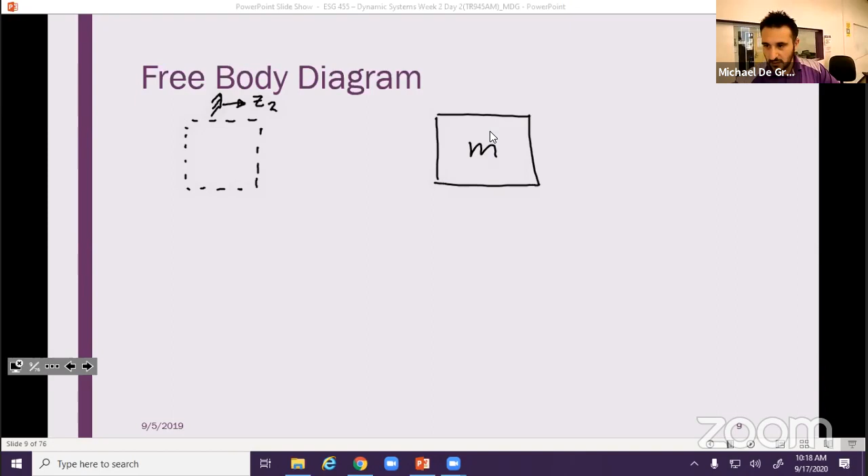So how do we deal with this? Well, we'll start the same way that we start everything, right? The free body diagram. And I'm gonna draw this, and this is my massless node, which is not to be confused with this, which is my mass, my object. Notice one is a dashed line and it doesn't have the letter M on it, and the other is a solid line. I know, it's crazy how you can do these things.

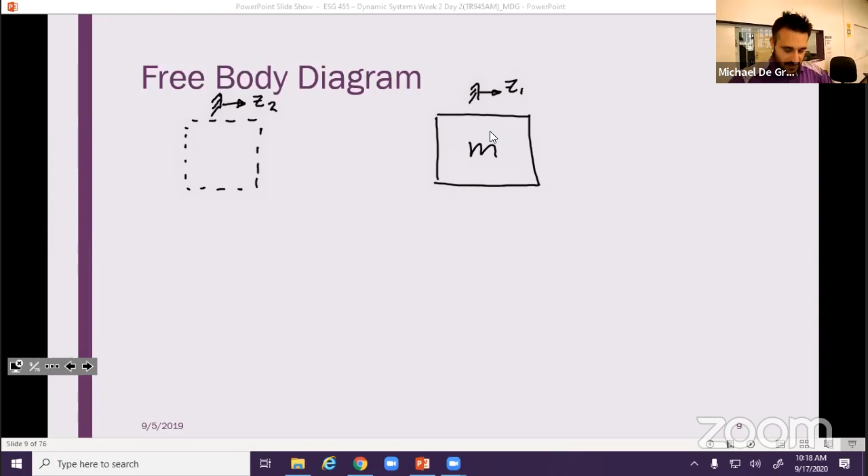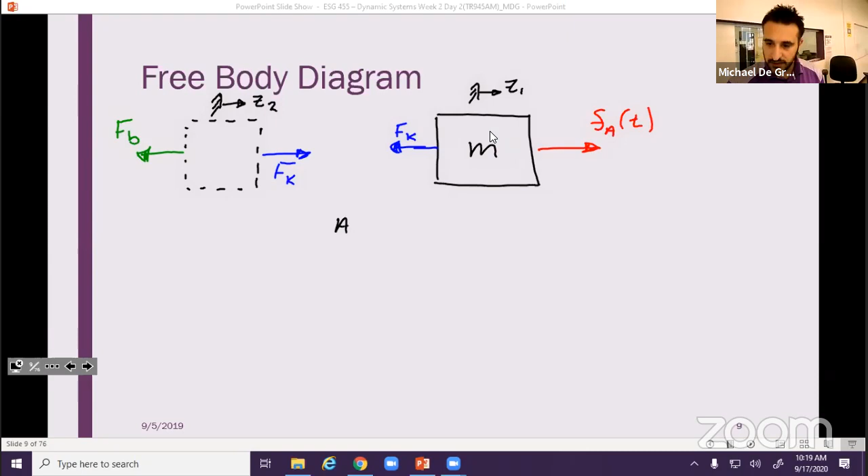What's happening, right? We've got this applied force here, we've got a spring attached here, F sub K. And so what have I assumed about this? I've made an assumption about this system. I have assumed that the first mass is going to move more, so assume that Z1 is greater than Z2. I've assumed that. How do I know that?

By looking at this. Well, I've placed the spring in extension, right? It's pulling back to center. If you were to separate a spring, it would want to come back to center. Remember, spring forces have to be equal and opposite if they're acting on two different bodies. Otherwise, you have an exploding spring, which is not good. Nobody wants that.

Okay, so cool. So can you do this problem and assume that it's in compression? Sure. How does that change it? It's just going to change your signs. At the end of the day, it's going to come out basically the same.

So if we really wanted to do a kinetic diagram for this, right? This would be equal to MZ double dot 2. And this one is equal to MZ double dot 1.

Okay, but what do we know about the mass of the massless node? What do we know about the mass of the massless node? It's zero, because it's massless. So if the mass is zero, then mz double dot is also zero. So my kinetic diagram is this, where mz double dot is equal to zero.

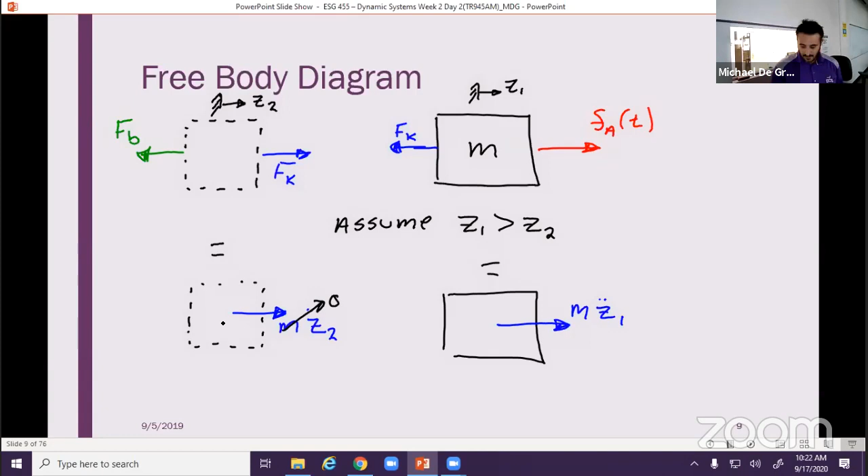So my inputs and outputs, what are my inputs and outputs going to be here? Somebody shout out. Your input force and the output is the position of the mass, I would assume. Sure. Z1. We'll say it's Z1 and Z2 just for argument's sake. But really, we're only really interested in Z1. We're not really interested in Z2. You can make an argument for both because as I pull it, there is that relative displacement that you're going to see between the two.

So mathematical truths, right? Well, it's a linear system. I'm going to sum my forces, mx double dot. I've got a damper, so I need this guy, and I've got a spring, so I'm going to need that guy. Cool, that's it, that's all the pieces. And I wrote X, because I write it as general, but if that's confusing, remember we're using Z, so we can always use Z.

All right, I have one question. Yeah, so isn't the force from the spring going to be proportional to the difference between Z1 and Z2, not the absolute position of Z2, because the damper is capable of moving?

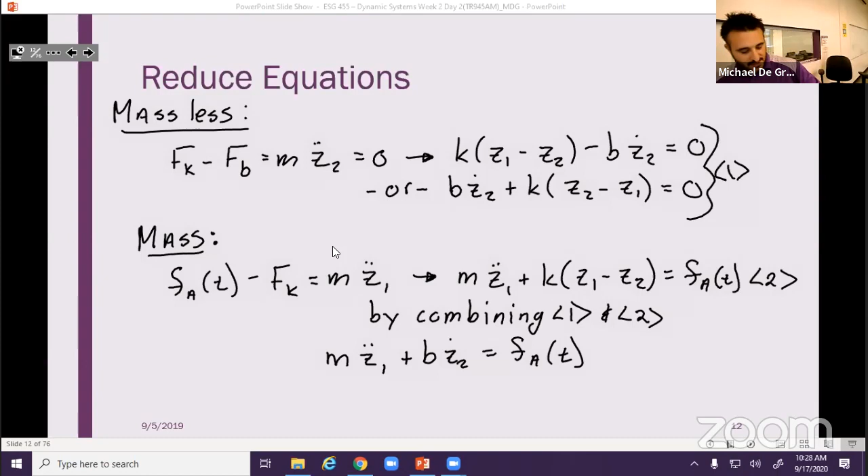So that brings us into our example problems from the sheet. What do we have? We've got this one, and AJ, you're up. Did you want to just see the sheet? Yeah, stop sharing, you can.

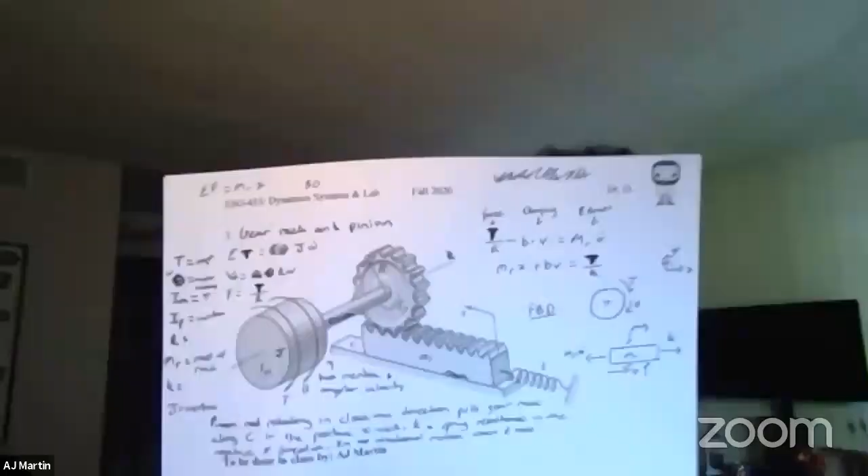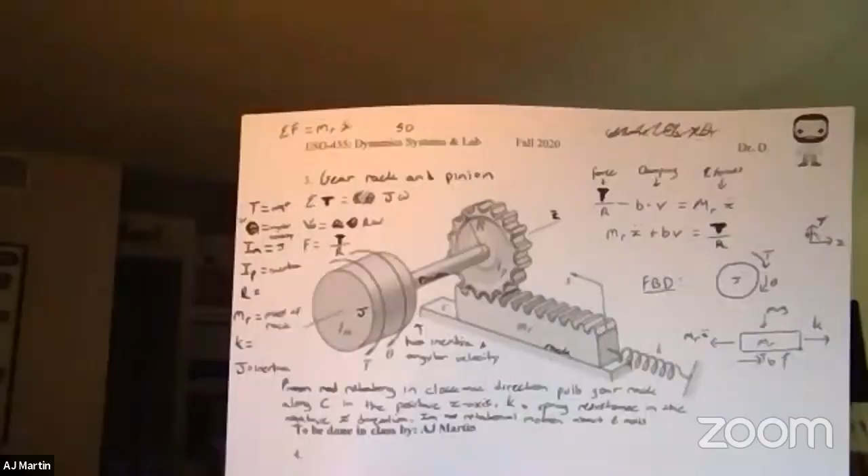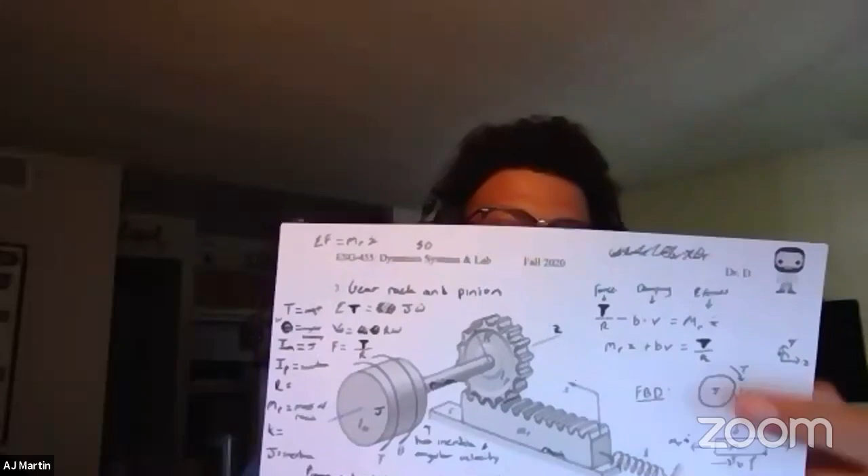I have a lot of stuff on there, but I got my free body diagrams here, and I just wrote a bunch of notes about the problem. Let's talk us through your free body diagram. It's kind of hard to see from the back. So I got the first mass, which I guess is the pinion - it has a torque that's going clockwise and a theta angle.

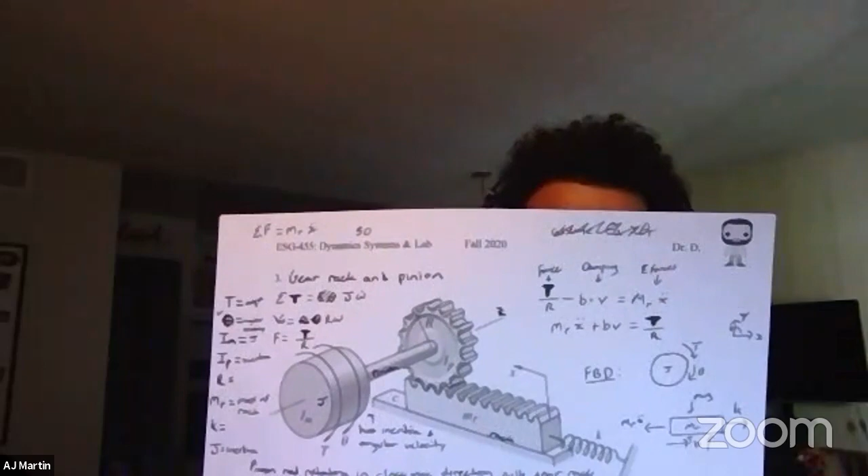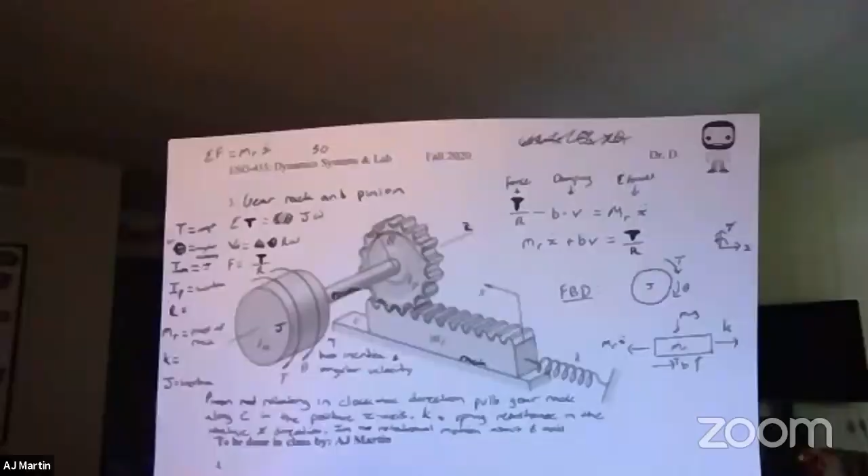And then you have the rack, which has a mass, and you have your forces acting on it in different directions based on the torque of the pinion. It looks pretty good - I'd say there's one thing you're definitely missing, and that's the contact force between the rack and the pinion. A rack is just a flat gear, a flat metal bar with gear teeth on it, and it interfaces with the pinion, which is basically a spur gear.

And those two things touch, right? So at the interface where the teeth touch, we need to have that contact force, because a lot like the problem we did in class with the wind turbine, when those things touch, that's how we're driving the system, through that contact force. Okay, but otherwise good free body diagram.

Looks good. So would that force just be pressing up against the pinion? Yeah, so if you think about how the teeth interface, it would just be a single force that's equal and opposite on each of your objects. And it doesn't really matter which way you pick it, because when we put everything back together, it's gonna cancel out anyways. Yeah, exactly. So let me pull this up.

I'm gonna share screen again real quick and draw the free body diagram, and I'll let you talk us through. Well, you know what, before I do that, why don't we talk about inputs and outputs?

What do we got for inputs and outputs? I didn't get that far. Well, I mean, it's pretty easy. You got, for the input, you have the torque and the pinion. Well, so if the input's the torque, what are we trying to get out of this system?

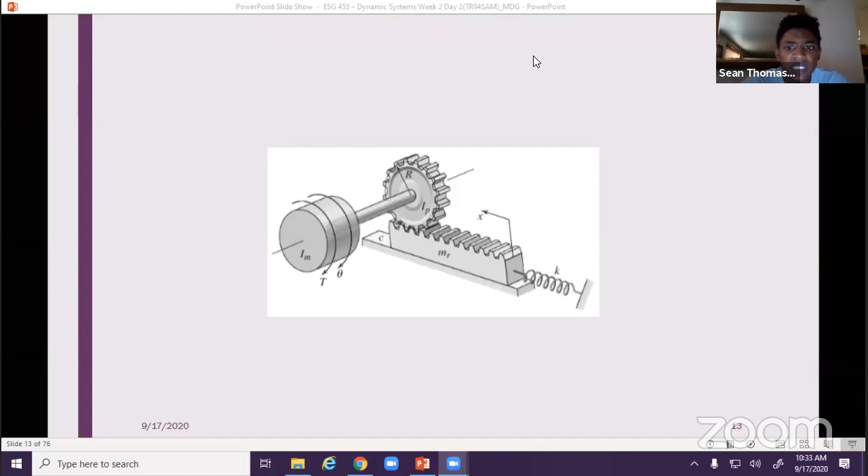Why would C be damping and not just flat friction? Because the book that I pulled this diagram from uses C as damping coefficient. So in reality, why would it be that instead of friction? Because, so you use rack and pinion, you might have heard as rack and pinion steering in your car, and typically you want that to be lubricated underneath. You don't want metal on metal contact, for smooth steering. So we're assuming that there's some thin film of fluid between the rack and the lower part of what it's sliding on, to minimize dry friction.

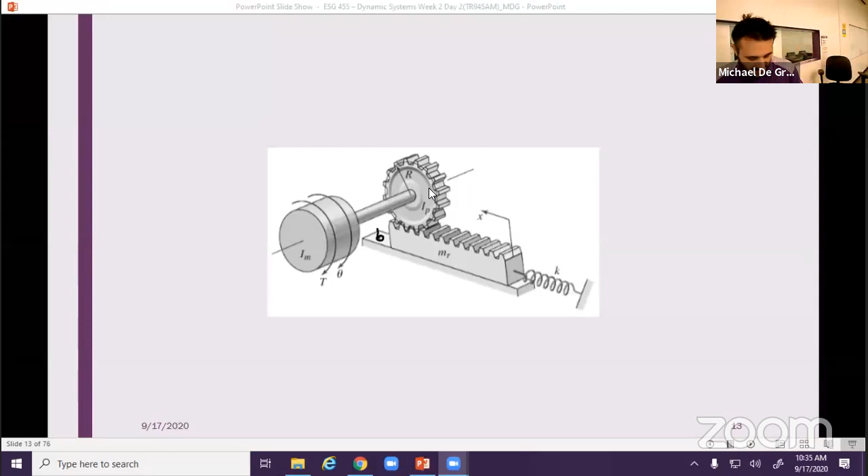What about when you look at this, what about that I sub M term? Why are they telling us about that? Now you can, we did a trick like this when we were talking about the wind turbine. We took all of our inertia and we collapsed it into a single inertia, we lumped it all together. And we're kind of doing that again here in this model, so the actual inertia here is going to be IM or JM plus JP.

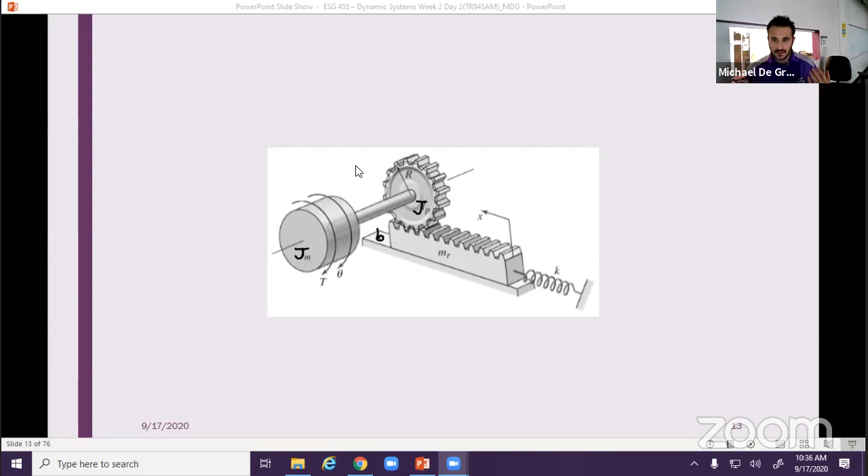So these two things are different. I call them J, and again, the variable changes, they're interchangeable. J and I are interchangeable, B and C end up being interchangeable. So I don't want you guys to get confused on the nomenclature, and I'm sorry for flopping between so many different things here, but just keep that in mind when we're doing this. So the J that we're using in our equation is actually the combination of JM and JP together.

Right, so here's our free body diagram, pretty much. AJ, you had all the y direction forces too, so yours is more complete than mine, for sure. But for what we're doing here, we're only going to be analyzing, we're going to assume that this is not going to lift off of where it's sliding, so we're assuming the ideal case. And you'll notice that I pretty much keep my free body diagrams in terms of the directions of motion that we're talking about. Like if we wanted kinetic diagrams, this would be J theta double dot, which is equivalent to J omega dot, those are equivalent statements.

What in this case would be your F sub C? Because I see your damping force, so FB is damping. FC is contact between the rack and the pinion, right? That's what that is. And this whole thing is moving in that direction, right?

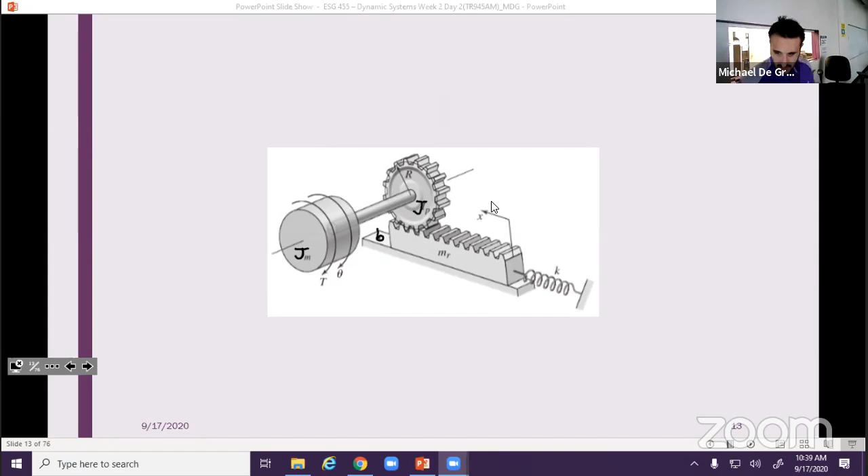Great. All right, so how do we do this? Do you guys want to start with the pinion or the rack? Where would you start? Let's start with the pinion. Pinion? Sure. So what should we do? If I'm going to start at the pinion, what do I do?

We'll go back up to our equations for a sec. If I can get this computer to work. Nailed it. Oh no, too far. All right, so just so we're clear, right, these are the equations, the truths that relate to my pinion, and these down here are the ones that relate to the rack, right?

So we're starting with the pinion, and then I've got to sum my torques, right? What do I have acting on this here? Oh man, well I forgot something on my free body diagram, right? Need that capital R. Okay, so I've got that torque, and that torque is acting in the positive direction. But I've also got this force, right? So how do I make this into a torque? How do I talk about the torque or the moment that is produced by that force on this system? We need the radius, right? It's just the force times radius, right?

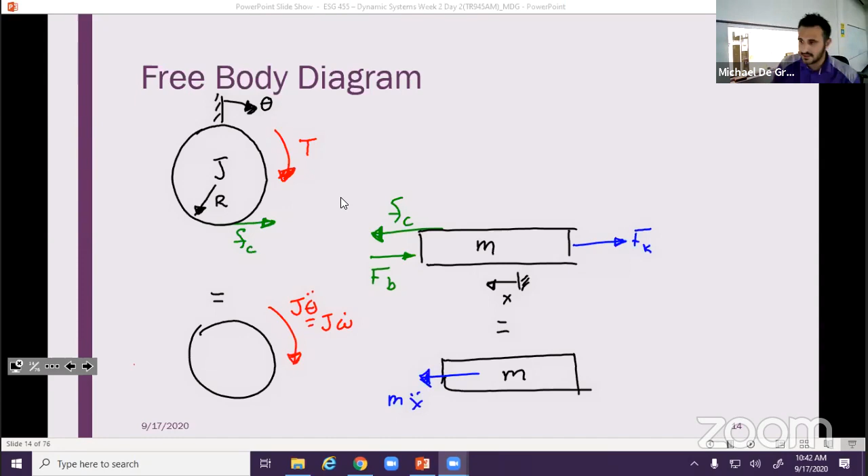All right, so is that going to be a positive or a negative torque contributed by the contact force on the pinion? Should be negative. It's gonna be negative, right? Because I'm gonna use my fancy moment simulator here, right? Okay, imagine what my fingers are holding at the center of the gear, and I push in the direction of that force. It's going to cause a counterclockwise rotation, which according to this system would be negative, right? Awesome, awesome.

So we can write out, to be truly pedantic, the force of the friction is just opposite whatever the direction of the torque is. So if it's negative in this case, but in a general model, it's just the opposite of whatever the direction of rotation is. So that F sub C isn't friction though, Danny. That's a contact force of the teeth on the pin, between the pin and the rack. Right, we're assuming, remember, we're basically not even looking at friction unless it's specifically called out as viscous friction, as damping in a lot of these problems.

Right, we're trying to maintain the linearity. Can you go back to the model? The model, yeah, I got this one here. Free body diagram.

Looking at this, so we're not talking about the contact force being negative, because it's not the torque, since that's heading in the positive direction. What component of this is going to be negative?

So this contact force is creating, by me applying a force here, right? If this was not connected to anything else, and you just had a wheel there, and you start pushing on the bottom with a known force, that would create a torque about the axis of rotation. That would be a negative torque or negative moment because it's that force times that distance, and it's going in the counterclockwise direction here, because according to this system, clockwise is positive.

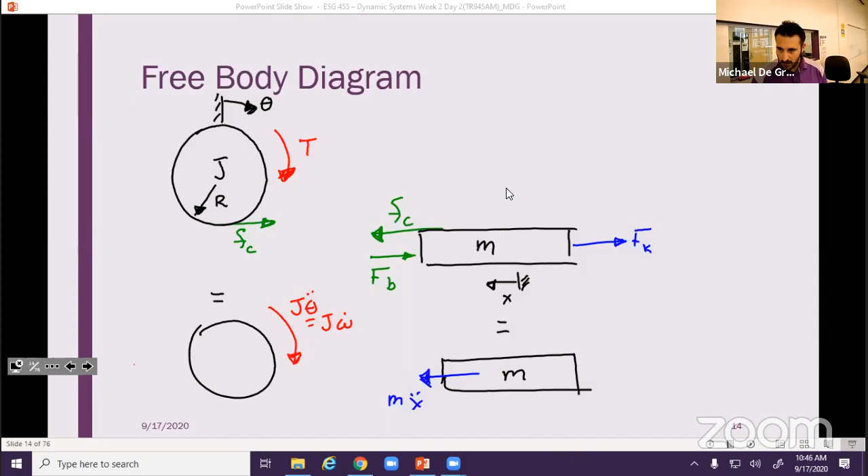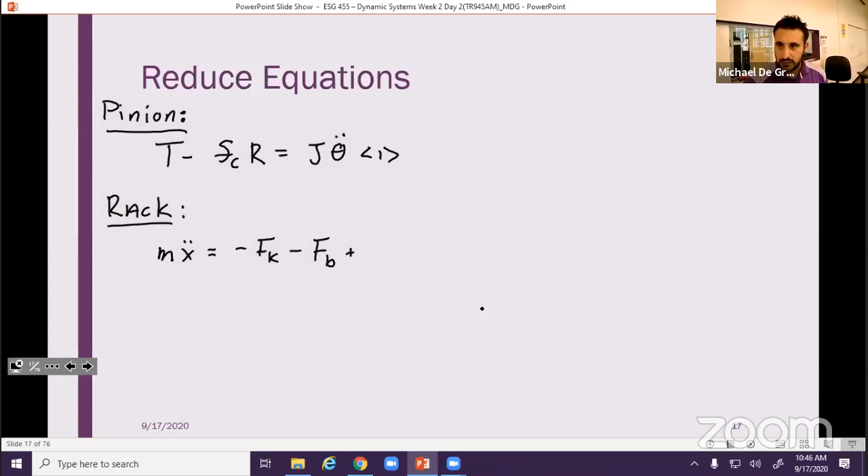So let's deal with that. I'll have m x double dot is equal to negative F sub K minus F sub B plus F sub C. Let me write it how I have it on the drawing, F sub C. So I'll plug in my other mathematical truths.

So m x double dot is equal to negative k times x minus b x dot plus F sub C. And then finally, we can leave this as m x double dot plus b x dot plus kx is equal to my contact force. Call that equation 2.

And so I think it's pretty obvious what we would do with this, but we're going to do it anyway. We're going to combine these two things. We already have something that is solved for F sub C, so we're going to plug equation 2 into equation 1. Let's go ahead and do that.

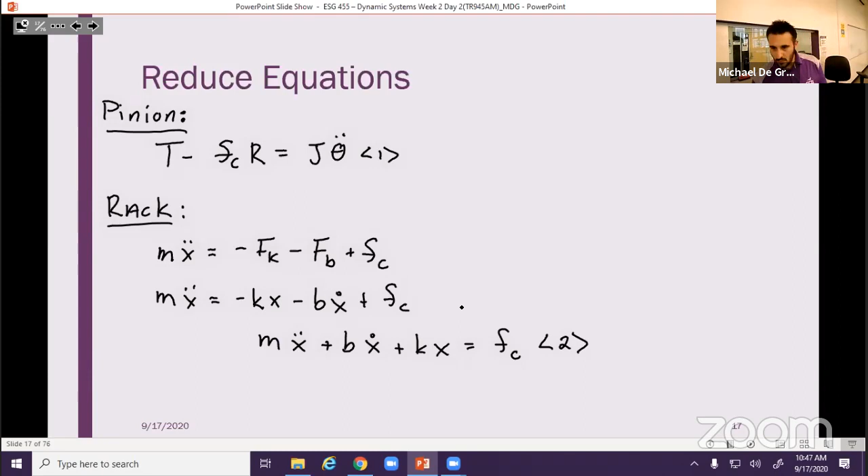Right, so I'll end up with T minus m x double dot plus b x dot plus kx times r is equal to J theta double dot. Okay, that's a thing. And we could certainly leave it like that, kind of, maybe.

Well, what did we say our input was? We defined our input to be T, and our output we defined to be x. But unfortunately, we've got T and x and theta, so we need to convert theta into x. Conversely, you could also say my input is T and my output is theta, and convert all of your x's to thetas. It doesn't really matter, but we're gonna do it anyway.

We said x, we defined it as x, so there should be an x in there, there should be this x right here times r. All right, so how do I do this? How do I get theta?

How do I convert theta to x? Well, remember, we talked about this a little bit. X is equal to r times theta, right?

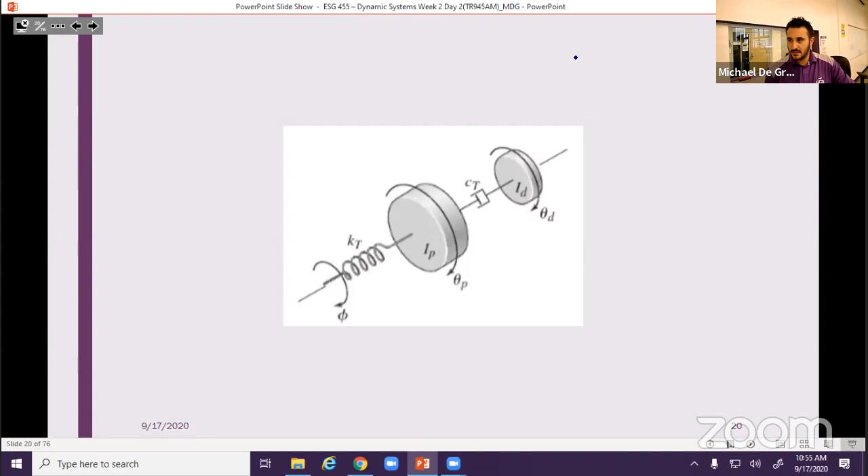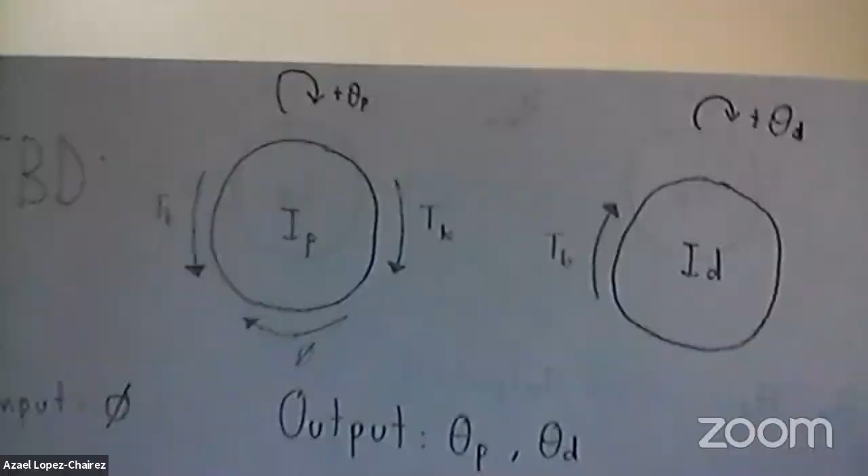Okay, so this is what I have for my free body diagram, or both. I don't know if you can see it. I mean, that looks good to me. And then I have the inputs and the outputs.

Okay, and then the truths. So mathematical truths, we're looking at Newton's second law for rotation. You've got some change in position, right, for your spring.

All right, so let's talk about that damper. Is that damper a free end or is it fixed end? The free end. It's free end, right? So you need to account for that with your equations, right?

The other thing I would say is if you're going to use theta P and theta D in your free body diagram, make sure that translates into your mathematical truths. Call out the variables that are on the free body diagram. Don't use different ones. For systems like this where it's not really that difficult to discern which one is which, it's fine, but for things that get more complex with multiple angles and positions, if you can draw it back directly to your free body diagram, it's significantly more helpful. But so far, so good.

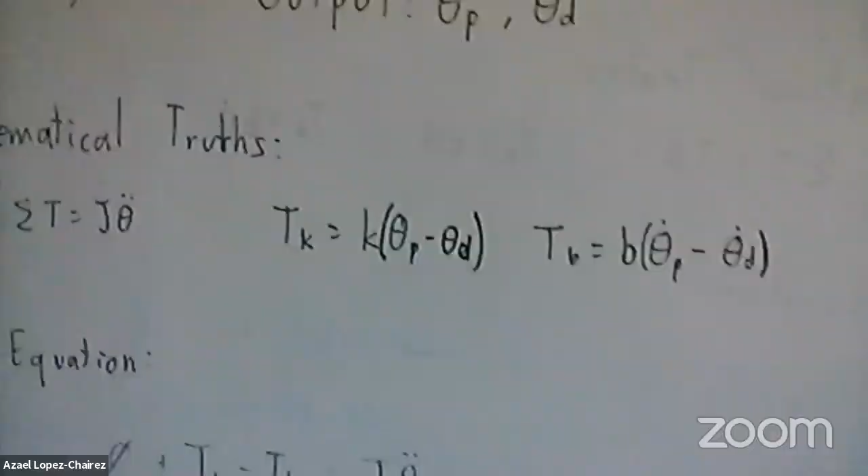So that looks better. So yeah, do something like that, right? Well then I have the reduced equations.

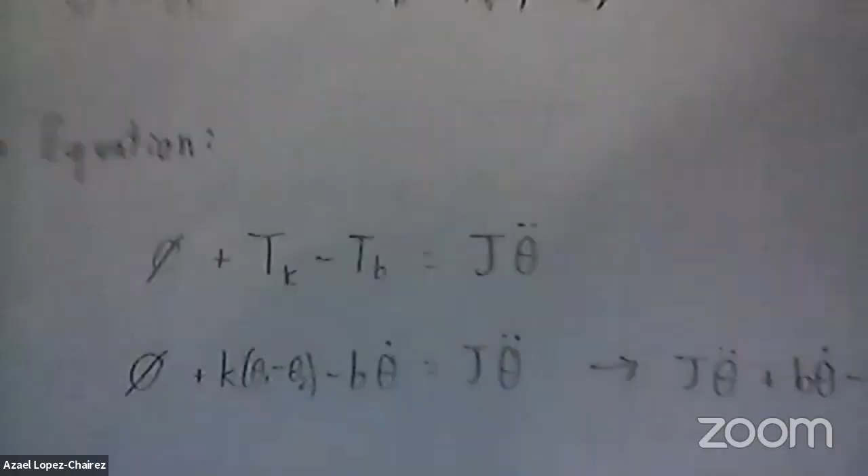So would it be like this? Yes, that's what we want to do. Okay. So in that case, I have to change my reduced equations.

Right, so that's going to change your equations up a little bit, I assume. Right, now again, for things like on an exam or homework, if you mess up a little bit, that's fine. I'll take your equations that you wrote down and I'll check to see if that is what your model looks like. So I'll use the stuff that you give me.

So make sure, you guys, I can't stress this enough: make sure that you're showing all of your work on everything that you do. I understand that not everybody has the nicest handwriting, believe me, I am guilty of that as well. And I understand that sometimes you do work in different places, but I would also highly encourage you to do things in a sequential manner at the very least.

I can't control your handwriting, and I'm not going to force you guys to take penmanship classes, but please make sure I can at least read it. If I can't read it, it's not like 'oh, he can't read it, so he'll just assume that it's right.' No, that's not typically how it works. So make sure I can read it, and if you can, please try to be as sequential as possible with your work so that it leaves a trail. I will hunt through your paper and try to make sense of it if I have to, but I would greatly appreciate it if you guys could just go sequentially.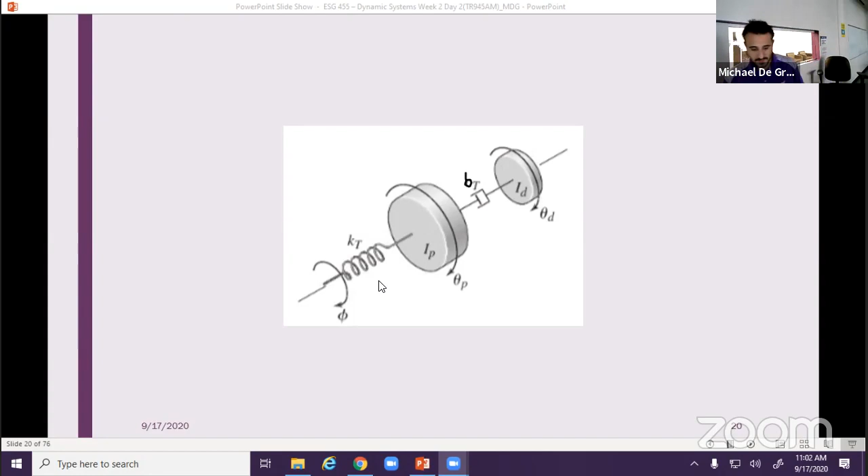Okay, so if we get to our free body diagram, right, Azael had this.

I figured I'd draw it too, just to have it up here. And I'm going to assume a couple of things here. What I've assumed is that phi is greater than theta P, and that theta P is greater than theta D.

Now, notice, and I want you guys to see this here specifically. The damping acts oppositely to the motion. It doesn't have to do with the input torque or the spring torque, right? It acts oppositely to the motion.

We have assumed by writing our coordinate systems here that everything is moving in the positive direction while we're doing the problem, right? And then if our signs come out the other way, that will inform us that we chose poorly, right? But we're going to assume that everything is moving in the direction that I've indicated here.

Which is why TB is fighting TK here, and which is why TB is moving opposite. Well, no, let me back up. The reason that this one's acting with theta D here is because they have to be equal and opposite on both ends, right? They are connected on both ends. So internal forces trump what is supposed to happen. If you have a fixed end damper, it's got to be opposite the direction of the spring.

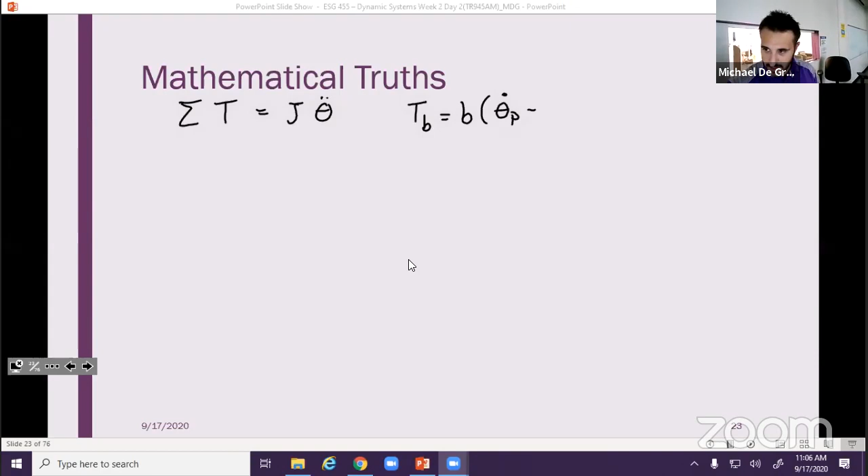We have our mathematical truths, right? So I've got sum of my torques is equal to J theta double dot. I've got my damper is going to be B times theta dot P minus theta dot D. And I've got my spring is K times phi minus theta P. And that's where we ended up.

So where should we go from now? We've got choices, right? We can either do J sub P or J sub D. Can you go back for 2 seconds? Where, Dante? What do you mean go back to? The truths.

Remember, the mathematical truths are just identifying the elements of the system. Whatever elements that I have in my system, I need a mathematical truth for that. That's what I need. So if I have a spring, I need my spring equation. We're specifically told that this uses K sub T, so that's a torsional spring.

Specifically told that. Okay. Cool. Do we have any other questions so far? Is everybody doing okay? No? All right.

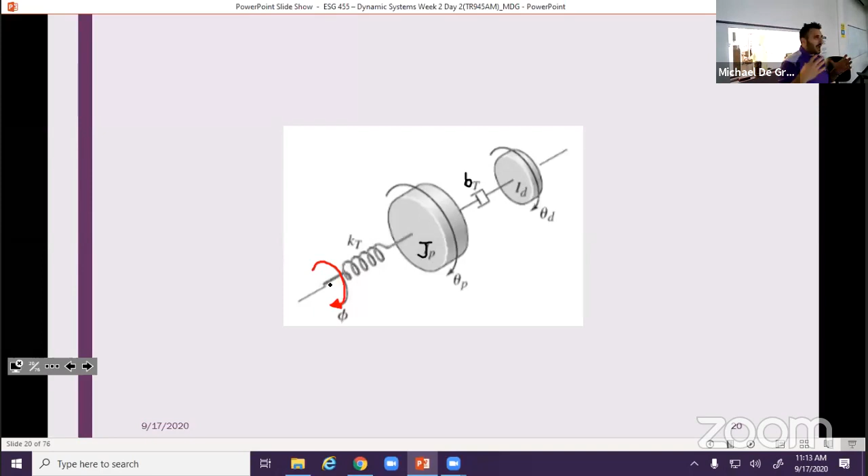That I am putting in some angle, right? I'm displacing everything. Now, if I look, don't look at that D, that disk D, right? Don't look at that. Just look at how it's connected to J sub P, okay? If we look just J sub P, right? If we look just at this, the local, right? And when I say local, I mean, I can break the system up into pieces, right? They're all coupled together in this case, right? They're coupled together by this damper, right?

But I can ignore the effect of that theta D, right? And I can say, well, locally to just J sub P, I have the input of phi and the output of theta P, right? Then if I come back and I ignore that spring, I can look at just the second portion, right? And locally, I have some input theta P and some output theta D, right? But on the whole, from end to end, throughout the entire system as a whole, I'm going to twist this and I'm going to get this and this as my outputs, right? I'm going to twist this by phi and I will get theta P and theta D as my outputs on the whole. But it's okay and it's appropriate to want to analyze just half of a system, right?

It's okay. Maybe you're just interested in how much theta D moves based on how theta P moves, right? You're not really too concerned about what the actual input angle is. It's hard to tell when all you get is a picture and no description of what this is actually. But yeah, that's the difference between a local and a global. Global means we're looking at the entire system as a whole. Local means if I'm just looking at one portion of it, what are my inputs and my outputs?

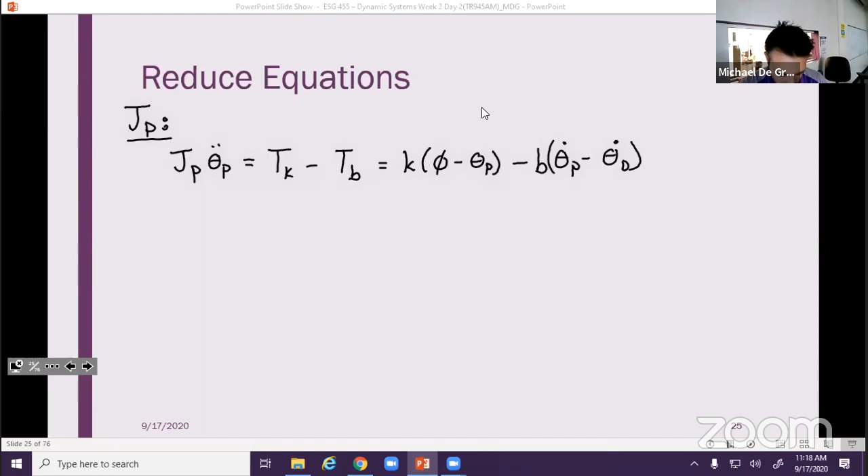Okay, so if I plug in what I got from my mathematical truths, I'll get this. So this is going to tell us that I want all of my phis on one side and all of my thetas on the other, because we're going to write this in terms of global inputs and outputs. So I'll have to do a little bit of algebra: J theta double dot p plus b times theta dot p minus theta dot d, plus k times theta.

Is it incorrect to write TB minus TK instead? What's that now? What? Can you explain why it's TK minus TB instead of TB minus TK? I can.

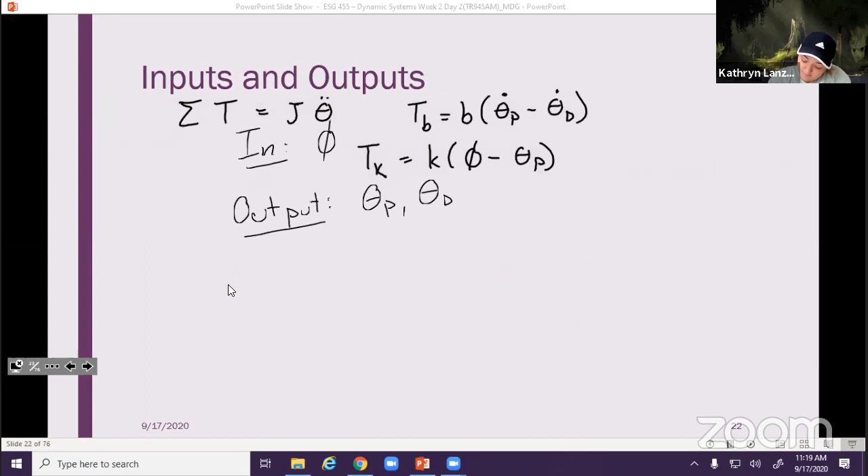I will explain it right here. TK is positive and TB is negative. We've assumed that positive rotation is going in the direction of the motion here. So this follows and then that is opposing.

So again, I said this on Tuesday. I keep wanting to say Monday, but it was Tuesday. I said this on Tuesday, I'm going to say it again in a slightly different way. God did not create coordinate systems. Man created coordinate systems to try to describe what God created. They are arbitrary, they are human made. You can pick it to be whatever you want. I will check your work based on the coordinate system that you put on the paper. If you don't put one on the paper, then I'm going to use whichever one makes most sense to me. So you should just put one on the paper. Put one on the paper. All right, cool.

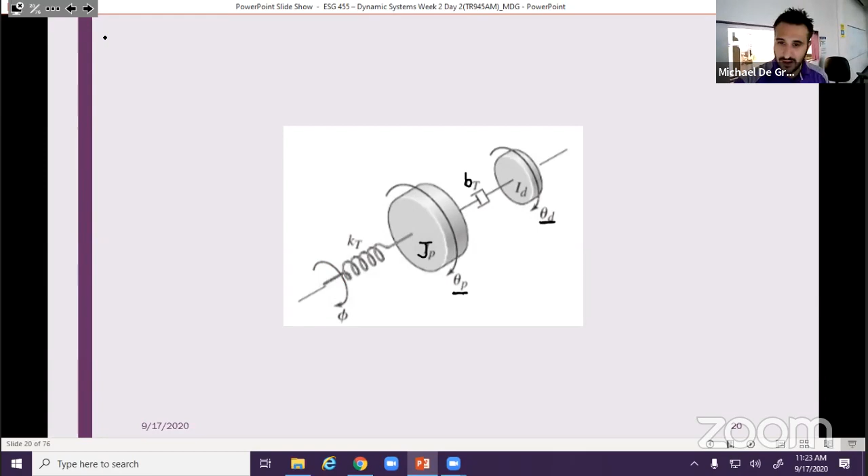All right, let's go back one more. I think it'll be better here. Okay, let's talk about it here. So I've got this input of phi, right? Imagine for a second, let me draw it a little bit bigger. I've got this spring here, this guy. And I'm going to twist the front end by phi, okay? But the back end is attached to this disc, and that disc is moving by theta p.

So the total displacement of that spring angularly is the relative position, the relative angle that we've twisted through. It's a lot easier to conceptualize this with linear or translational motion. The example I like is imagine two toy Matchbox cars, and one had a spring on its bumper attached to the nose of the one behind it. If I move them both the same amount, that spring distance hasn't changed at all. But if I move the front one by 2 inches and the back one by 1, I have a net displacement of 1 inch, so I'm in extension. Likewise, if I move the front one 1 inch and the rear one by 2, I now have a net compression of 1 inch.

So when we're talking about springs with a free or a fixed end, when we have free end springs, we have to determine how much did it move on the front end and how much did it move on the back end. And so those assumptions that I wrote down help me to understand which way I should be drawing my torques. Because if phi is greater than theta P, what does that mean? Now I'm going to try to draw this, and it's probably going to turn out horribly, but we're going to try anyway.

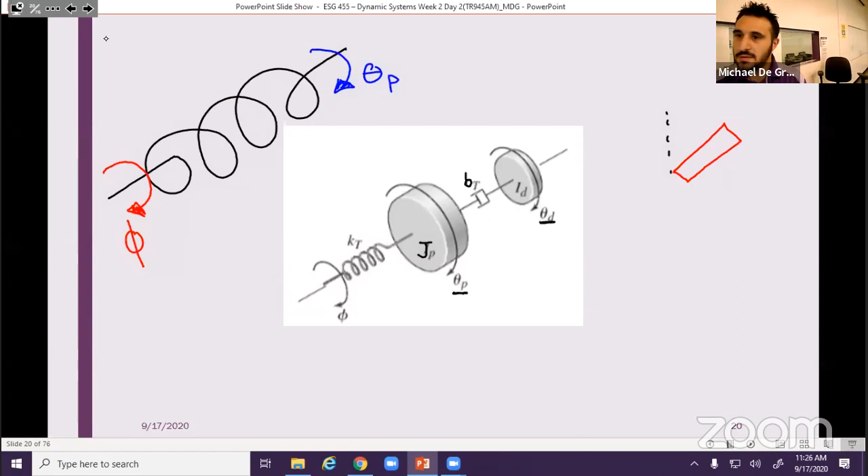But the back is moving at a different rate, and it hasn't moved as much, so I'm going to actually draw this a little bit more exaggerated. So here is that, I drew it the same angle because that was a good idea. So this has moved from my starting position by phi, but my other end of the spring isn't moving as much. So this only rotates through theta p. Well, I've got this extension now in the spring, I've separated the coils. And so I've got this net, we'll call it extension because it's separating the coils.

Whereas if I had assumed that theta p was larger, it would have extended to here, and this would have caused a compression of my coils, it would have pushed the coils into one another. And I realize this is not drawn great, you really have to use your imagination to figure out what's going on here. But this depends on the direction in which I apply my torque, because in this case, where theta p is less than phi, I've got some extension, so this wants to actually fight back. But did I draw this the wrong way now?

Maybe I assumed it wrong. So we got TK going one way. TK is fighting the motion, right? It's fighting if we're extending the spring, if we're opening up the coils, it's going to want to fight us. I think I wrote my assumption in the wrong direction, now that I'm looking at this way.

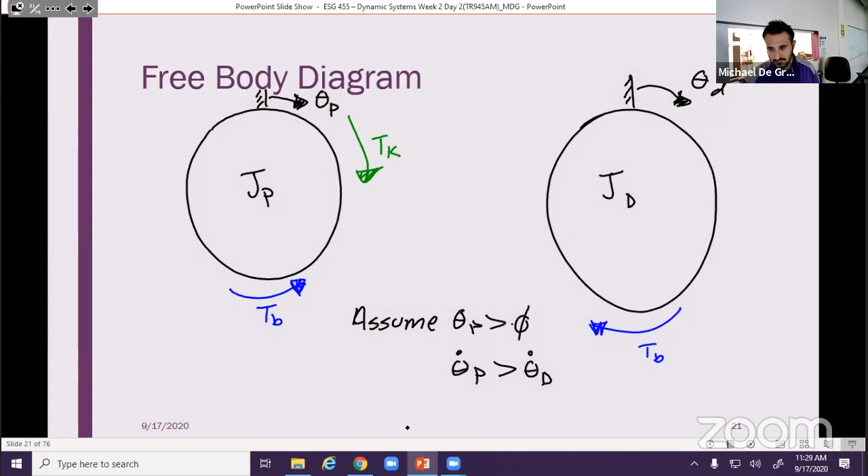Okay. Torsional springs are rough, they are. So that's going to change our equations a little bit, right? Because now this isn't there, this is like this, right? So it doesn't affect the JD equations, it just affects JP.

And that's where the effect comes in. So where did it affect it? We had to switch the signs on our K. Essentially, we had it just in the wrong direction, right?

What's the penalty for sign errors? It's like half a point. So Dr. D loses half a point for this lecture. I'm okay with that. I'll add it to my running tab. Yes, I'll add it to my running tab.

Sign errors are the least of your concerns for right now.

All right, so what does it do? I flipped the sign. Could I have also flipped the torque direction? Sure, but that's also going to flip the sign. It's going to make this negative instead of positive. Okay.

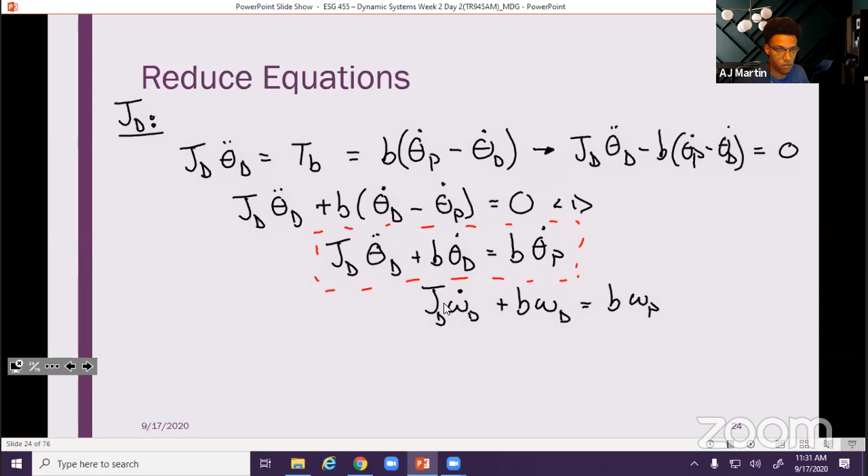Why is there no input there? Is that what you mean? No global input? Why is P not included in JD? Is that what your question is? Yeah. Well, we changed JD around so that on the other side of the equal sign it was B theta P. But how come we didn't do that for JP? Okay, so why didn't I move... gotcha, I got you. So why did I leave theta D here? Right, yeah.

Because equation 2 is written in terms of global inputs and outputs. Globally, my input is phi, and I have two outputs: theta P and theta D. Could you do it in terms of local inputs and outputs? Sure, you could throw theta D on the other side, it wouldn't be that big of a deal. But the reason I left it there is because technically theta dot D is a global output. So this is a global equation saying, hey, I've got some phi and this is going to give me some theta P and theta D.

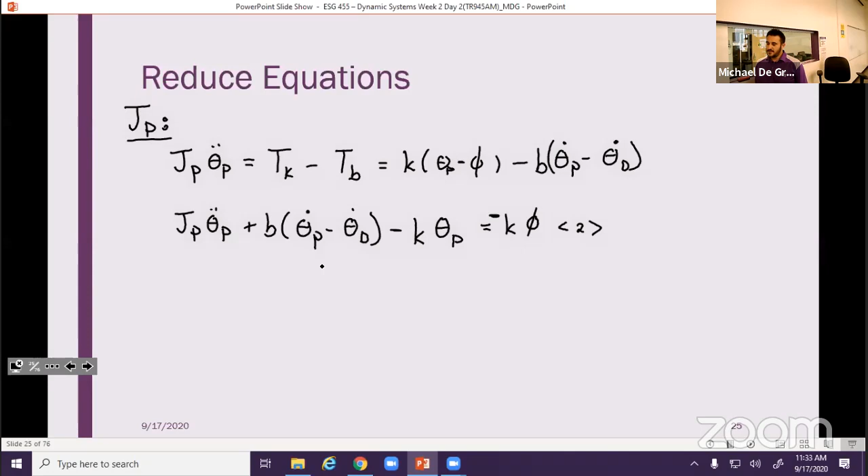The other thing we could do, which would be really gross, and please don't do it, but some of you will try anyway, you could solve this for theta dot D and try to plug it into equation 1, which I would not recommend doing. I think that would be a big mistake, so don't do it. Later, when we get to Laplace transforms, that'll be made a lot easier.

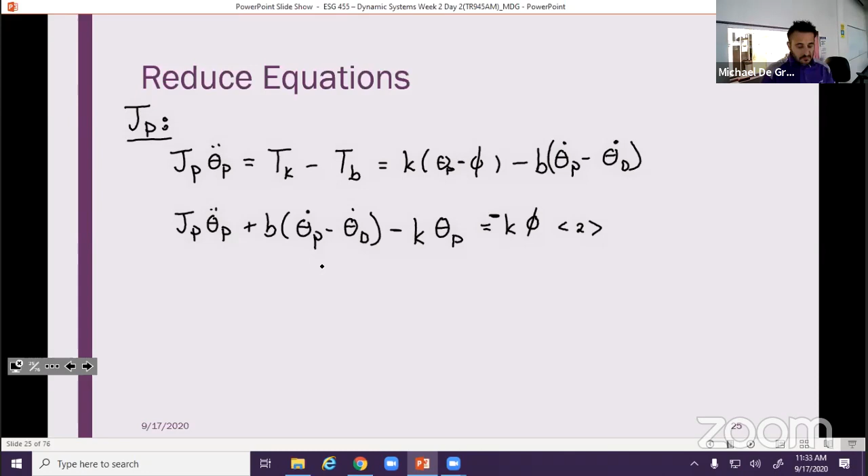Okay. Cool. Any other questions? Yeah, I just have some clarifying ones I want to make sure.

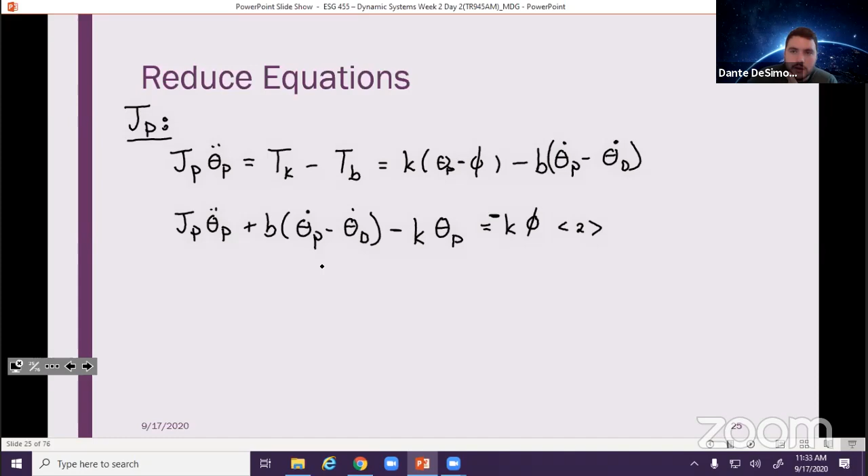So the TB, we're writing that in because we're assuming it's the friction of fluid. Wait for it. One more. So we write that TB, right? Why are we writing that TB? Well, we're writing this TB because we actually have a specific damper called out.

Oh, it's a damper, right? Right, so we have a torsional damper called out. You'll see a lot of these problems, they'll tell you, right? It'll say, oh hey look, there's some damping in here, or hey look, it'll be like the rack and pinion one, right? There's a very little C in the bottom corner that was trying to indicate to you that there was some damping there. So be aware, really look at the schematics and see what's included.

Now in problems like that, not in class problems, like homeworks, right, you guys have probably noticed that there are problem statements that tell you a little bit about the system, right? So for some of them, when it's not obviously apparent, I try to make it clear, at the very least on exams, what exactly you need to be solving for.

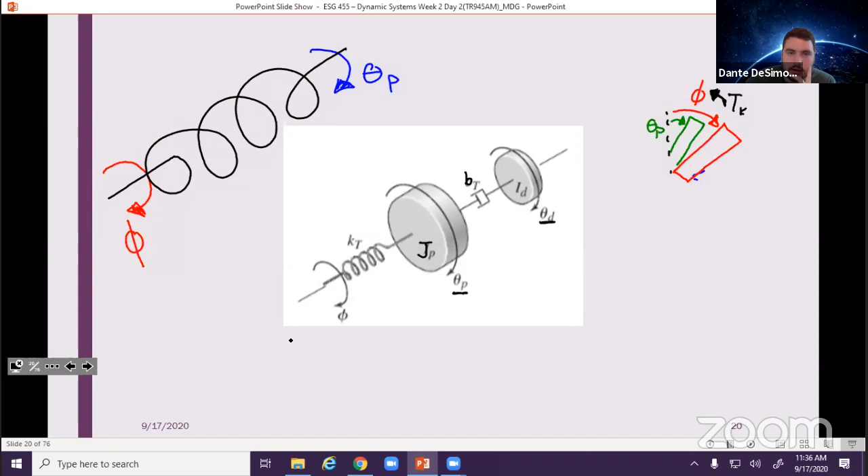Oh, and then one more quick thing. Why are we, I know it's for the damper, but why are we putting a dot above the theta for theta P and theta D? For which one? Just for here? Right there, for my assumption or for what?

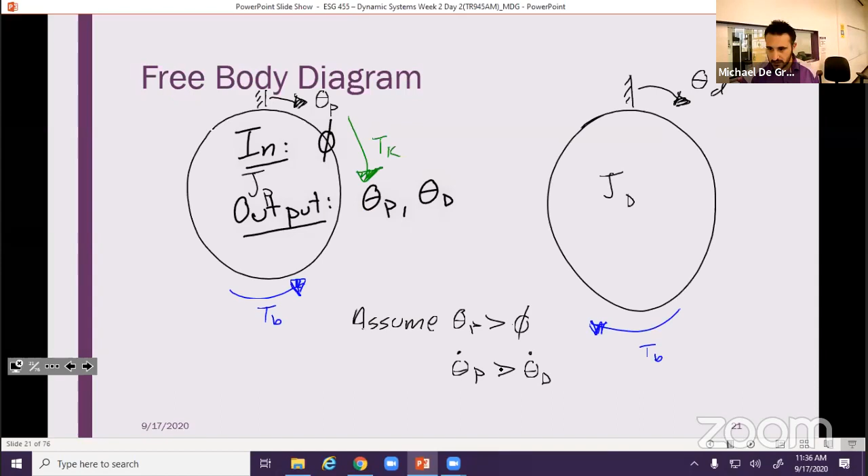For, yeah, assumption. Because this determines, it's kind of like the spring, right? So a damper is a function of the velocity, right? And so if one side's moving with one velocity and one side's moving with the other velocity, right, you have to determine what is the relative velocity between those two, right? So again, if the front Matchbox car was moving at 10 meters per second, which would be ridiculously fast for a Matchbox car, but we're going to say it anyway, right? And the back one was moving at 5, there would be a net damping force between the two if I had a shock there of 5 meters per second, right?

You would have moved the net velocity, right? So think about it this way, right? The thing that's connecting the two is going to have, I don't want to put this right. So if you were standing on the damper, right, you would view yourself moving at whatever the difference is between both sides, velocity wise, right? So we're always defining things with a free end based off of the relative velocity, right? The relative velocity of that object. Got it, in terms of velocity. Cool.

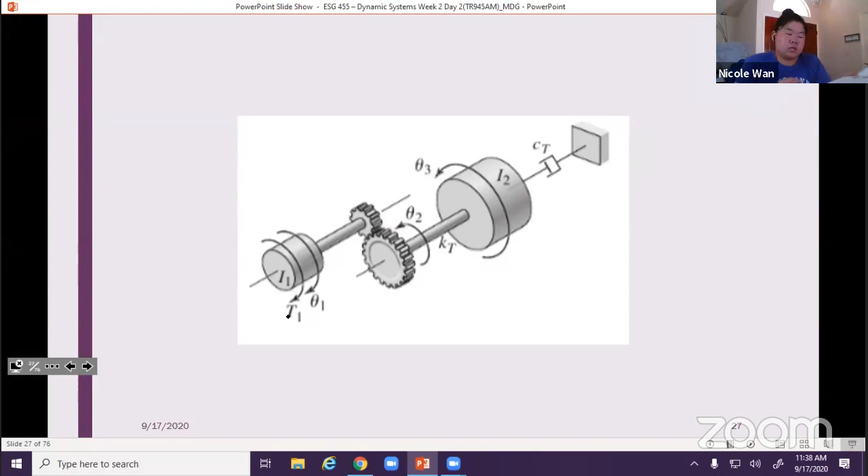Nicole, you are up. Okay, so hold on, sorry, let me. No, you're good, I have to give you the main stage.

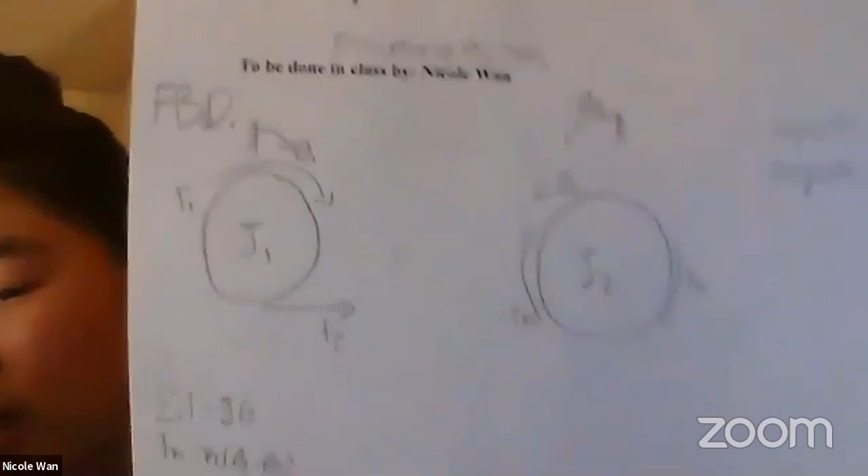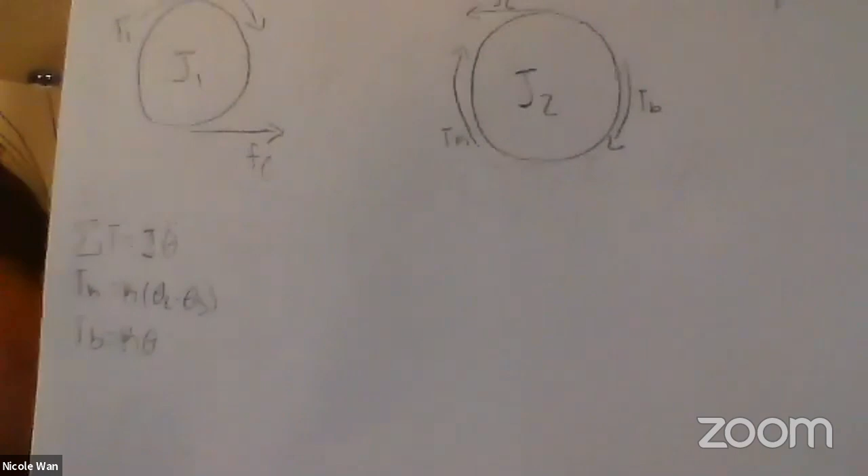That's my bad. Okay, so here is my free body diagram. I don't know if you can see it. And then I have the inputs off to the side, and then the true mathematical truths right there. I'm not super confident with the output just because with the thetas, I know the directions are different, so I wasn't sure on that part.

Okay, so we've got three essentially three pieces, right? Here you've got that J1, that first gear set. You've got the other gear, we'll call that J2, and then you've got that inertia J3. So there's a couple ways that we can do this, right?

The way that you did it is fine. You've got J1 and your torque and your contact force, and the one moving in the opposite direction has contact force and spring torque. On your third one, you have spring torque and the damper, and your spring torques were equal and opposite, traveling in the opposite directions, so that was fine.

That looks good. The other thing we can do is create an equivalent system for this, in which we combine the total inertia of that first gear set into one thing, which can be done, but we haven't really gone over that so far. But your free body diagram looked good.

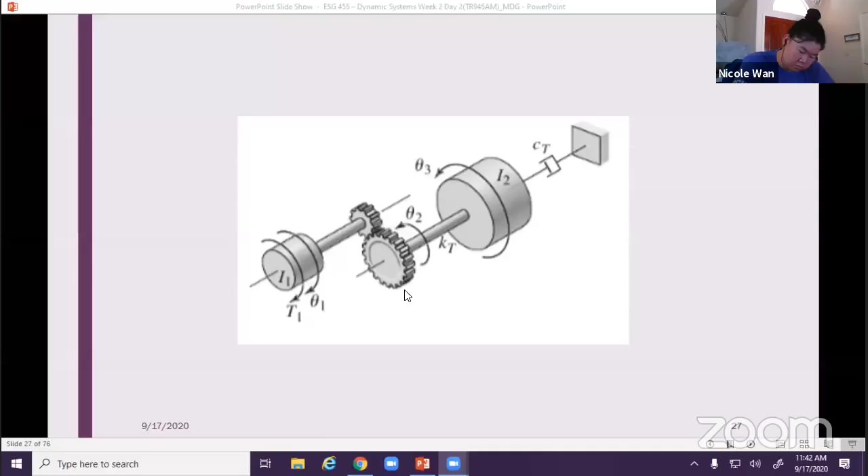I'm gonna switch back to sharing. I'll draw some of the stuff we talked about. Good stuff, good stuff. So let's talk about what this is doing. I'm gonna change some of these things here, just because I can.

So we've got this initial inertia that I'm applying a torque to, and that's going to rotate through some angle, and then that's going to cause the other gear to turn. And this is funky, because if we assume it's an ideal gear train, then that second gear doesn't have an inertia. But it's got its own angle that it's turning through, and theta 3 also has its own angle that it is turning through.

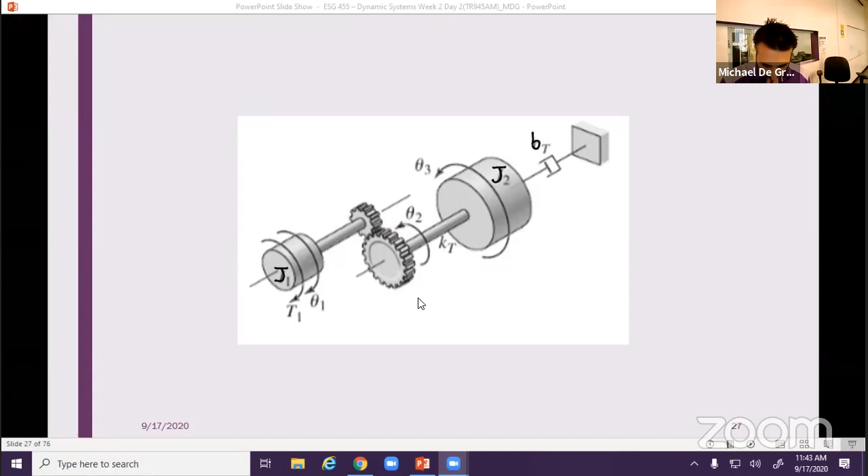And I've said, well hey, you can combine some of these things together. Well, technically we could, right? Now we'll talk about doing it, we'll talk about why and how. Let's talk about why.

Okay, so what have I got? I've got this guy and this. So let's start with, I'm going to draw it a little bit better. Let's start with this. So this is J1, and J1 has some angle theta 1, and we apply some torque T1, and we have some contact force, F sub C.

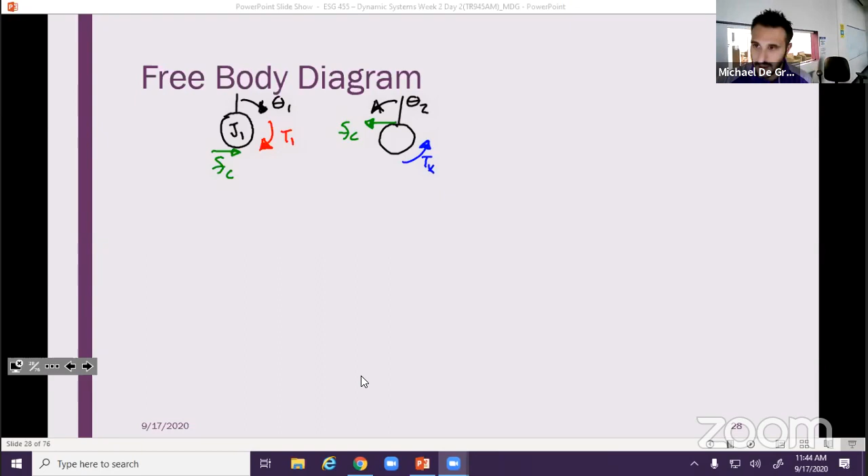Okay, then we've got gear 2 here, which does not have an inertia associated with it, theta 2. This is F sub C, and we've got some, I drew it this way, you draw it the other way, it doesn't really matter as long as you're consistent. And then I've got my large drum here, and that's going to have TB, but remember this has theta 3 in the opposite direction. And call that TK, I've got TK going out.

Okay, so let me make that a different color, so it's obvious. So something like that. Nicole, you had something similar to that, right? Your assumptions were a little bit different than mine, which is fine, it would still come out.

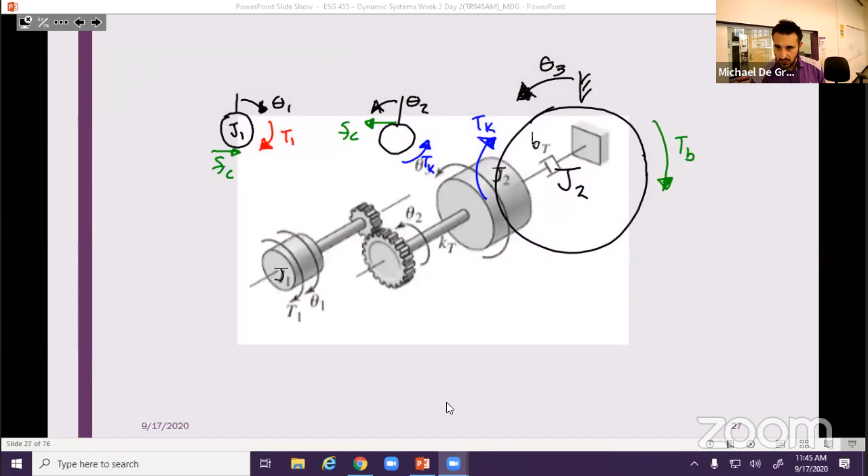All right, now talking about this idea of an equivalent system, right? Well, what would make it equivalent? Well, if I combined, right, what am I talking about combining here? I'm going to take essentially that and make it into one thing. Why is that possible? Well, it's possible because of the gear ratio.

We talked about gear ratio last week, and we found out that, you know, the gear ratio, if I know the number, or if I know the gear ratio, I can know how to scale my input velocities or my input position or my input torque.

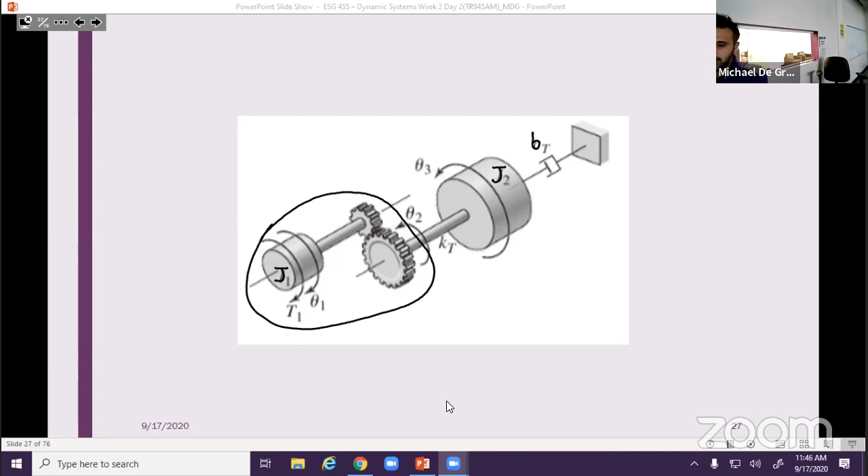So I can write T1 in terms of the gear ratio to tell me what the torque at this other gear would be. And I would consolidate all of that inertia into a single point. I have that input torque, but really it's effectively transforming into this other torque.

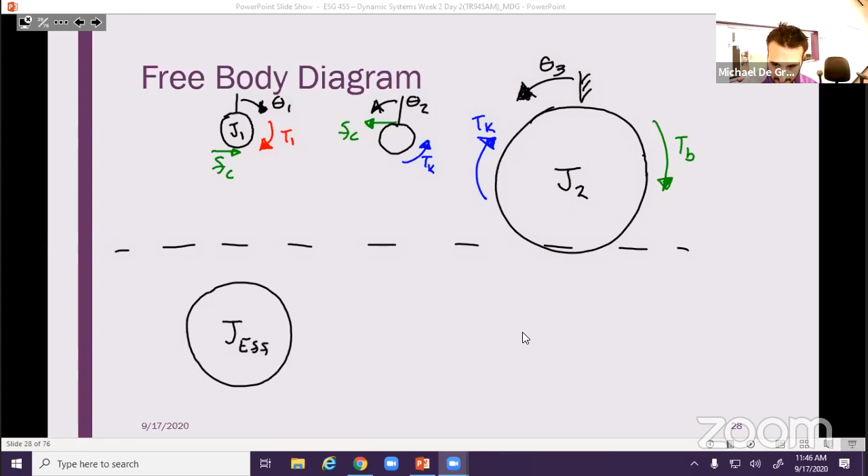We'll draw it down here. If I was to lump all that together, I'm going to have something here that I'll call J effective, right? And this is now going to be rotating by theta 2. It's going to have some torque, which is T1 effective - the transformation of my input torque into what it would be after.

I just realized that says Jeff. That's funny. So we've got Jeff here. This is Jeff. Jeff's a nice guy.

We still have our spring right now. Let me use the same colors so it's quick. So we still have our spring torque here - that's still going to happen. We're still going to have J2, and J2 doesn't feel as cool anymore because it doesn't have a name like Jeff. But J2 looks exactly the same - we haven't done anything to that second inertia.

Now, that's theta 3, right? So that's theta 3.

And again, this is predicated on the fact that we can use our gear ratio. I'll just write it here. Gear ratio is equal to omega 2 over omega 1, or n is equal to theta 2 over theta 1. We have this idea of the gear ratio. We know how this is going to scale our torque. Torque actually scales with, I believe it's...

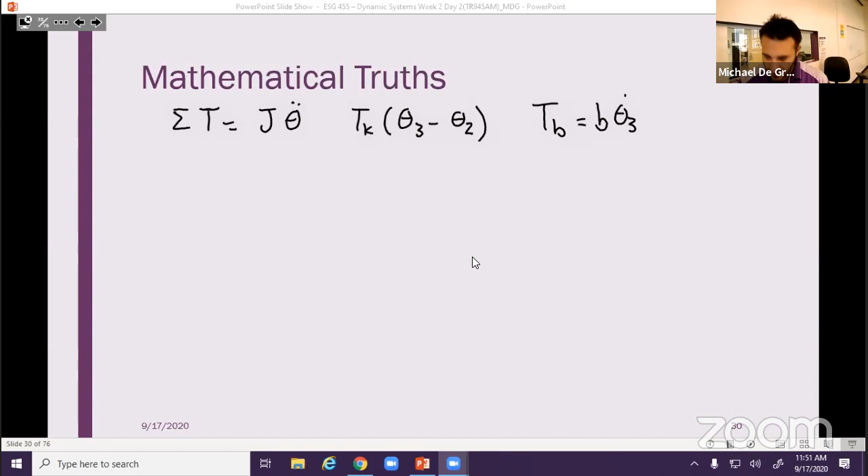We're going to use kinetic energy to determine our effective inertia. What is J effective? How do we define it? Well, this is how we're going to do it - I know that the kinetic energy of this system has to be 1/2 what I'm going to call J1 omega 1 squared plus 1/2 of J2 omega 2 squared.

Okay, well I can write all of this in terms of omega 2. I want to write all of this in terms of omega 2 because I want to consolidate this all down to omega 2. So how do I write this in terms of omega 2? Well, omega 1 is just 1 over n times omega 2.

So we end up with J1 times 1 over n squared, let me... 1 over n times omega 2, plus 1/2 J2 omega 2 squared.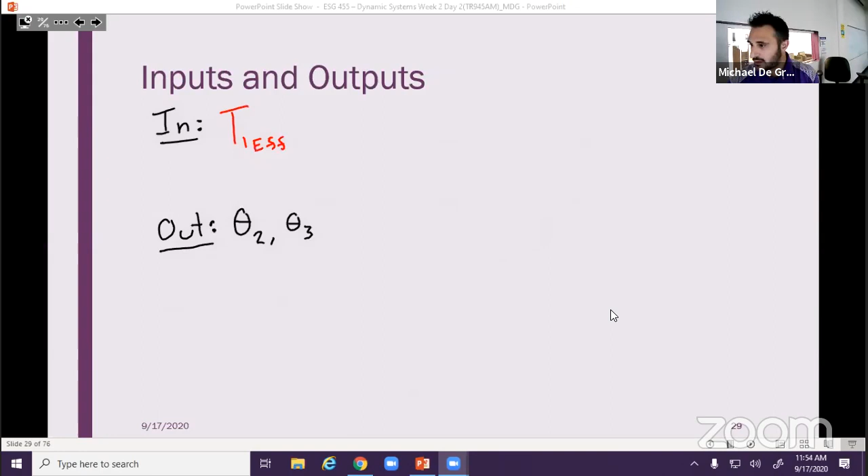If we go back to where our gear ratio is, right? Wait for it, we'll get there. Our gear ratio, we're using omegas. Omega 1 is equal to 1/n times omega 2. So I can get everything in terms of omega 2.

Why do I want that? Because I have this free body diagram right here, and that's in terms of theta 2, which means if I take the derivative of that, that will be omega 2, okay? So I want everything to collapse down and be in terms of omega 2. Wait for it. Right, so that's why I plug in 1/n times omega 2 for omega 1.

So this turns into this via the gear ratio. Okay, what happens here? Well, this stays the same, it's already in terms of omega 2, right? Then we just algebra, and so I'm left with 1/n squared, J1 plus J2.

Now the general form of kinetic energy for a rotating system is 1/2 of my inertia times the velocity squared. Well, this stuff all in here is just my inertia. But we know that the J2 term is 0, so Jeff, or J effective, J equivalent, is 1/n squared J1.

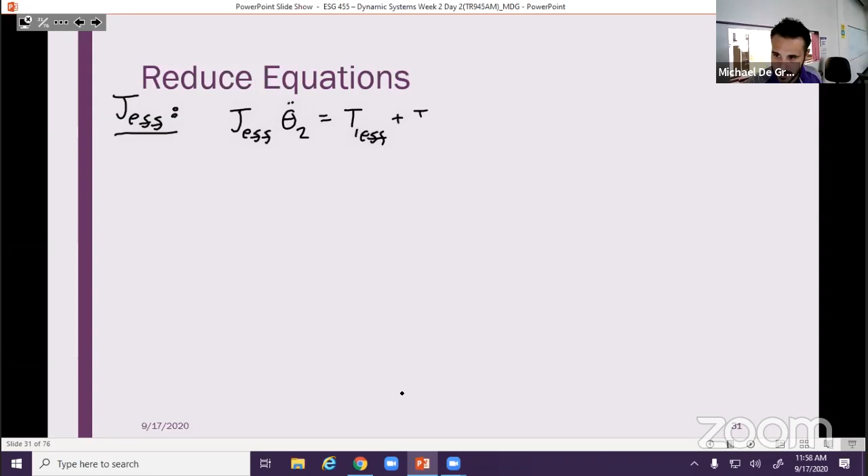All right, so what do I have? I've got J effective theta double dot 2 is equal to T1 effective plus TK. All right, well, T1 effective, K was given as theta 3 minus theta 2, okay.

So, I've got everything that I need in terms of what I wrote as inputs and outputs. I have theta 2, theta 3, and my effective T1. That's all my inputs and outputs. I don't have to do anything else here.

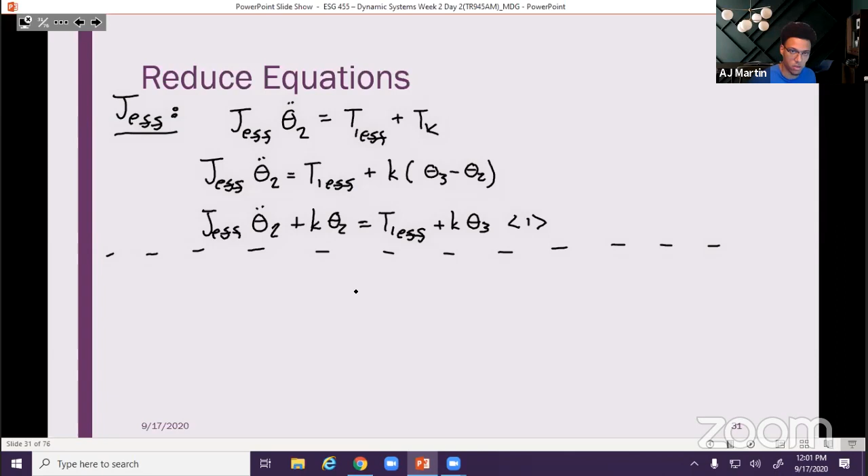So now we're going to do J2. You guys have your free body diagrams in front of you, it's going to take me too long to go back. What do we have on this? Well, the way that I've drawn it, I've got negative TB and negative TK as my torques.

So J2 theta double dot 3 is equal to negative TB minus TK. J2 theta double dot 3 equals negative B theta dot 3 minus K times theta 3 minus theta 2. So J2 theta double dot 3 plus B theta dot 3 plus K theta 3 is equal to K theta 2.

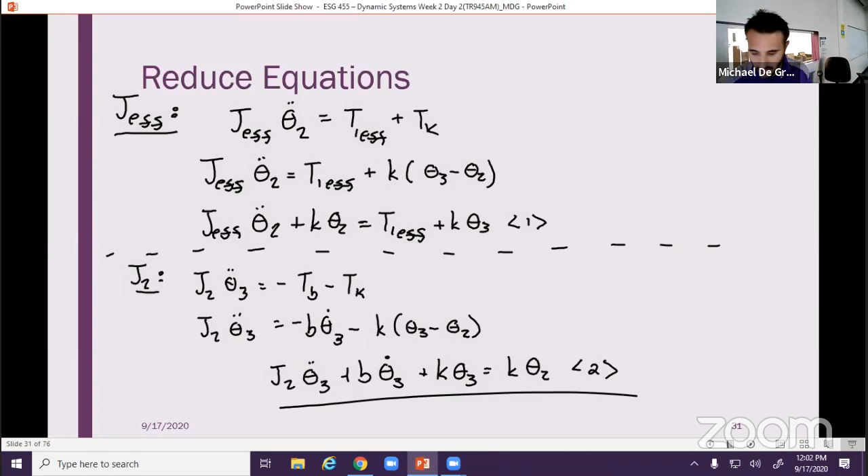In terms of theta 3 and theta 2. Again, if you're explicitly told, you know, they told me that theta 1 was an output, I was explicitly told in a problem statement, so that means you need to get all of your theta 2s in terms of theta 1. Well, how would you do that? We have the gear ratio.

We wrote it down on the other page. N was equal to theta 2 over theta 1. So if you wanted theta 1... sorry, I wrote that opposite the way that it should be. It's theta 1 over theta 2. No, okay. Dr. D is going bonkers here. N is equal to theta 2 over theta 1. So theta 2 is equal to n theta 1.

There we go. So you can use this and plug it in to here and to here, and you can get everything in terms of theta 1 through the gear ratio. It was asked, we will go over it.

How do we find Jeff? How do we find Jeff? Please don't do that, please. There we go, okay. How do we find J effective? I want to combine everything from the first mass.

I know the gear ratio, right? I know the gear ratio. I've been told enough about this system that I can figure out the gear ratio. Okay, so I'm going to write the kinetic energy equation, my kinetic energy equation.

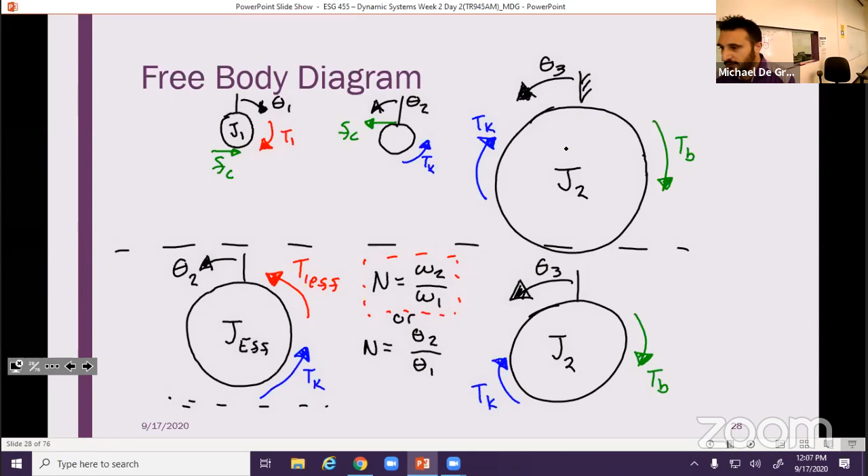Why does kinetic energy just make a sudden appearance in this case when it didn't with previous gear ratio problems? Because in previous problems, we didn't combine the system down to a single inertia. We did it the long way using this free body diagram on top, which is still fine if you'd rather do that. But because we have the gear ratio, we know how this torque will transform, and we can figure out what it's going to be once it passes through the gear ratio.

And in order to use this equivalent system, we have to do it that way - but you don't have to. You can do it the long way and step through: J1, a free body diagram for J1, write your equations, do it for this massless or inertialess gear, and then run it all the way through. What you hopefully find is that you get the same exact model on the back end. Why? Because they're equivalent - that's the whole idea of equivalence.

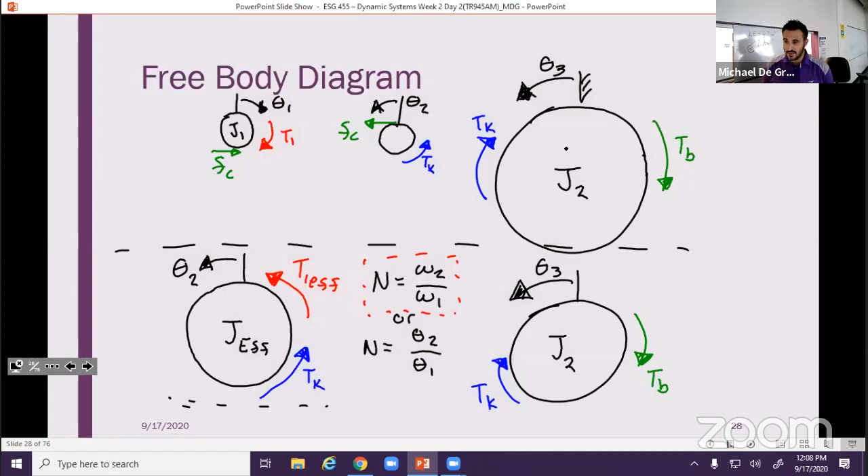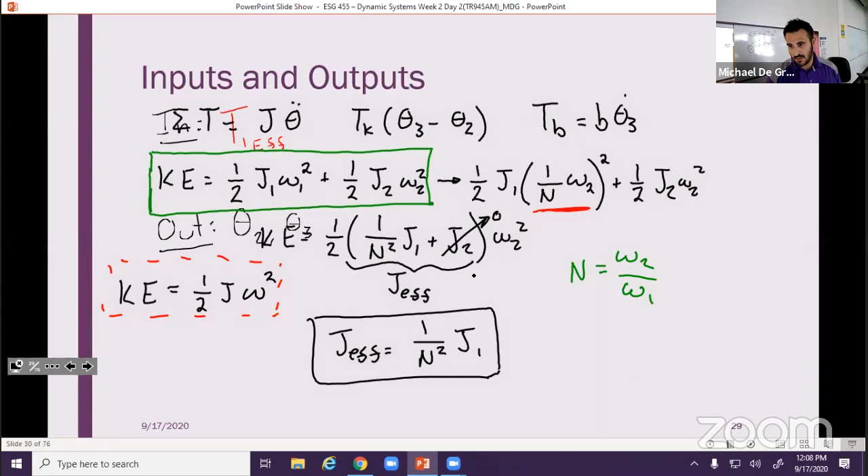But if we want to combine inertias, we need to look at the energy. And so we had it up there before, but gear ratio is equal to omega 2 over omega 1. Let's go back and double check - yeah, so omega 2 over omega 1. So gear ratio is omega 2 over omega 1.

So because of that, I can rewrite this. I'm really only concerned about what happens after I transform this torque, after I get through gear 2. So I want everything in terms of omega 2. I can solve this and say, well, omega 1 is equal to 1 over n times omega 2. And I'm going to plug that in to my kinetic energy equation.

And this still equals kinetic energy. So I'm going to plug that into my kinetic energy equation. Now instead of omega 1, I have everything in terms of omega 2. Why am I choosing omega 2? Because I'm concerned with what's leading up to the final portion - I want to know what omega 2 is.

Okay, so I plug this in. For omega 1, I say that's 1 over n omega 2. Then I do some algebra here. That 1 over n squared is just 1 over n squared, and omega 2 squared is just omega 2 squared, so I can combine like terms. My omega 2 stays here, my 1/2 comes out because everything's being multiplied by 1/2, and I'm left with 1 over n squared times J1 plus J2.

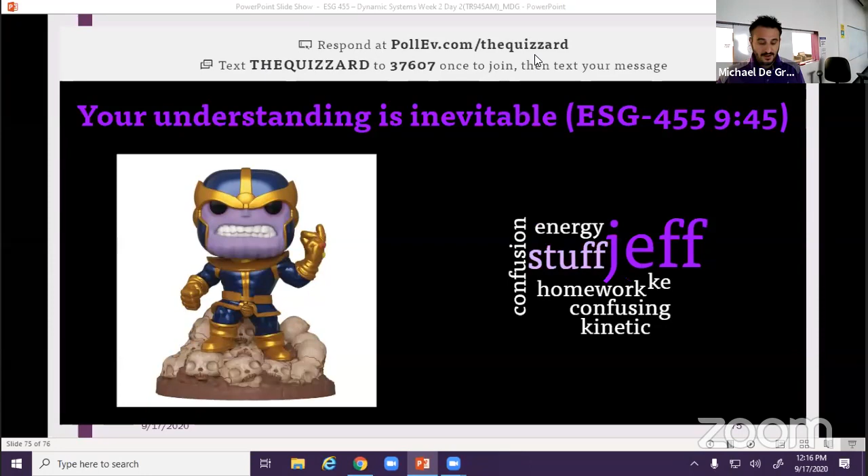All right, and that's what you're gonna get. And then next week we are switching, guys, we're going to one of everybody's favorite topics. Electrical systems starts next week. So just when you thought that you had this under control, we're gonna change it completely. Except that it's not gonna be completely changed. You'll see. Okay, we are done.

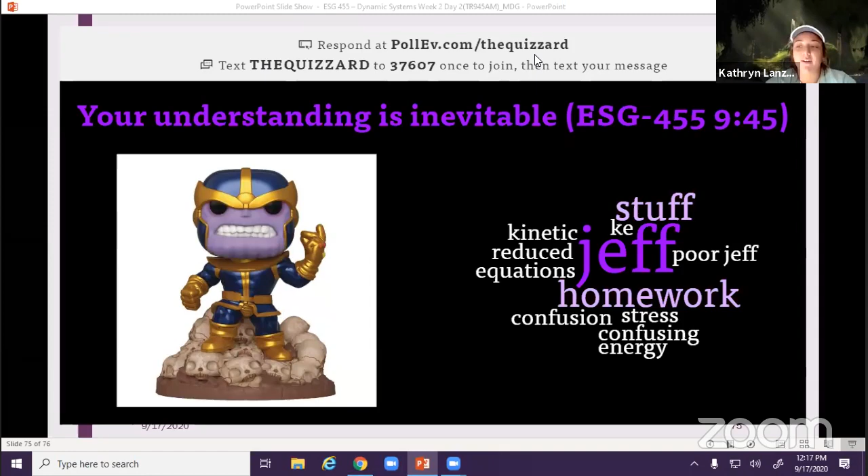Dr. D, what's up? I'm sorry, did you say that you would also post a video explaining how to do some of the problems for the rest of this week, or is it just going to be that PDF file? I will post a video for the last problem that we just did, doing it the long way without Jeff. Jeff will not make an appearance, you guys did not like Jeff, feel bad for him, but yeah, I'll post a video. I'll do it by hand and post a video on how to do it sometime this weekend.

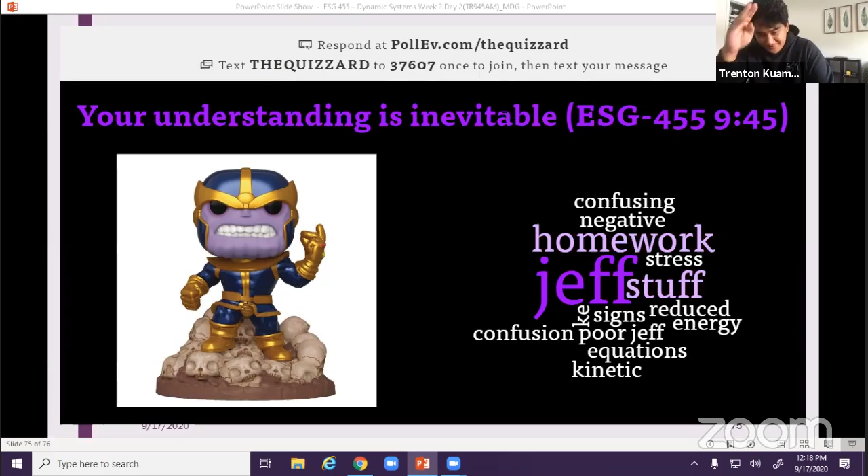I have a question real fast about the lab report that's due tonight. You said you wanted a time versus position graph. Yes, please. So you want us to go back through, watch your YouTube video and time multiple positions for each trial? Yes, for each trial.

You said only one person had to submit the lab report, right? Yeah, I only need one of you to submit it. It's fine, you'll all get the feedback, so don't worry. You'll get the grade and the feedback from the lab, you just won't have the lab in your Dropbox. That's the only difference.

Professor, I have a quick question. I know you have no office hours today, but I was wondering if you had time in between your classes. I've got another class in 10 minutes, and the class after this starts right at 3, so there's really not a lot of time today. Tomorrow I do have one from 3 to 5, but for lab help that's probably not helpful.